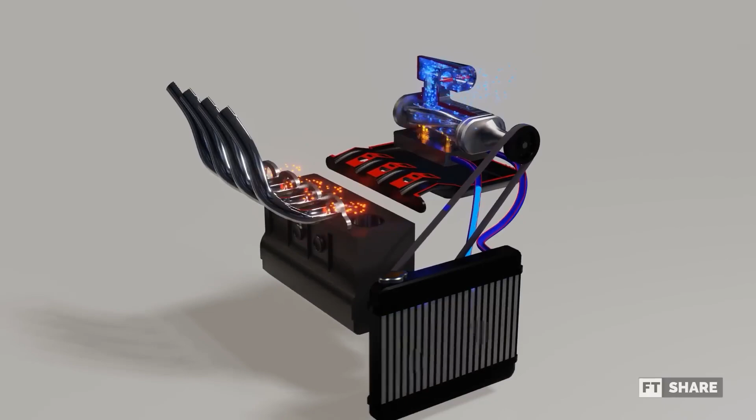In this video, we are going to discuss the rival of the turbocharger, a forced induction system that is commonly installed in muscle cars, namely the supercharger.

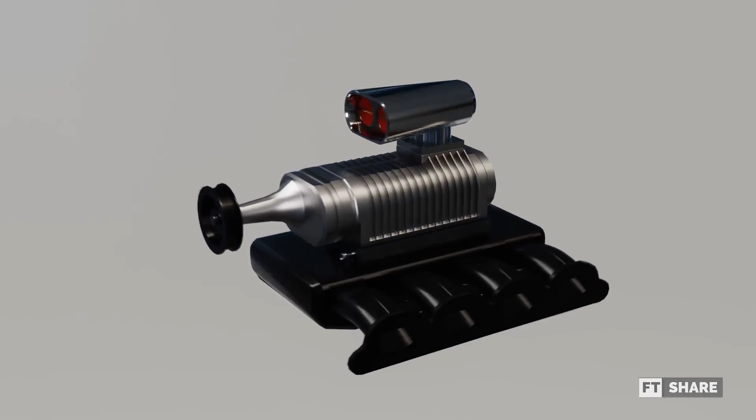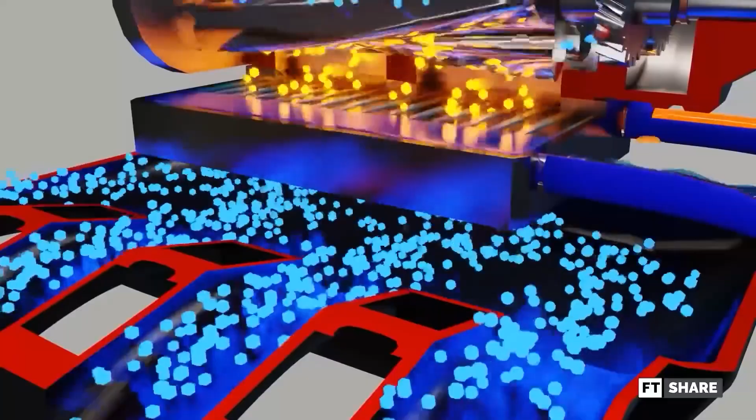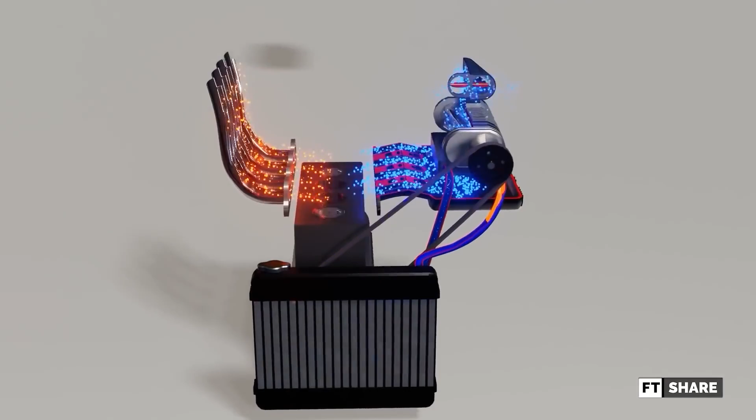The supercharger is a forced induction technology discovered by G. Jones in 1848. Thus, the supercharger was discovered before the turbocharger. The function of this device is to increase the air capacity and airflow in internal combustion engines, with the goal of providing more oxygen so that the engine can process more fuel more efficiently. And of course, this results in more power compared to standard engines that do not use forced induction systems.

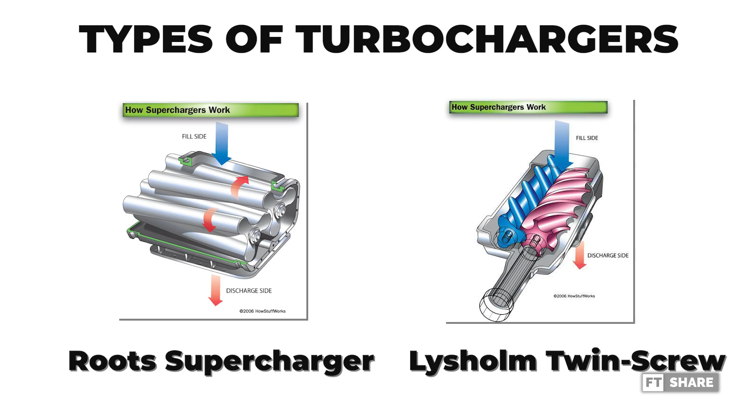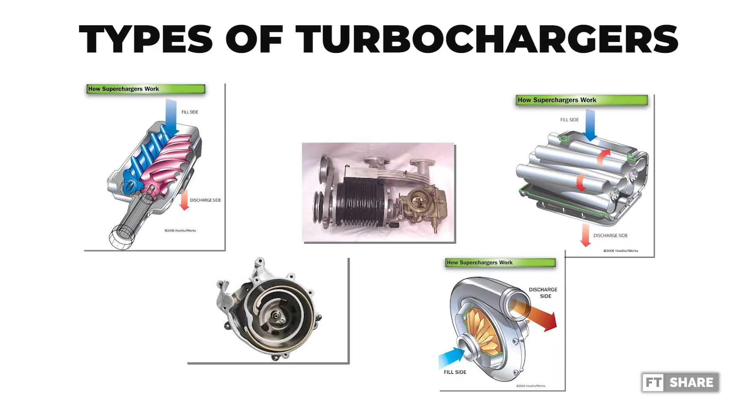There are several types of superchargers in the market. The first one is the Roots supercharger, the second one is the Lysholm twin-screw supercharger, the third one is the sliding vane supercharger, the scroll-type supercharger, and finally there is the centrifugal supercharger. Here, we won't discuss all these types one by one because the goal of all these superchargers is certainly the same, which is to introduce the principle of forced induction system.

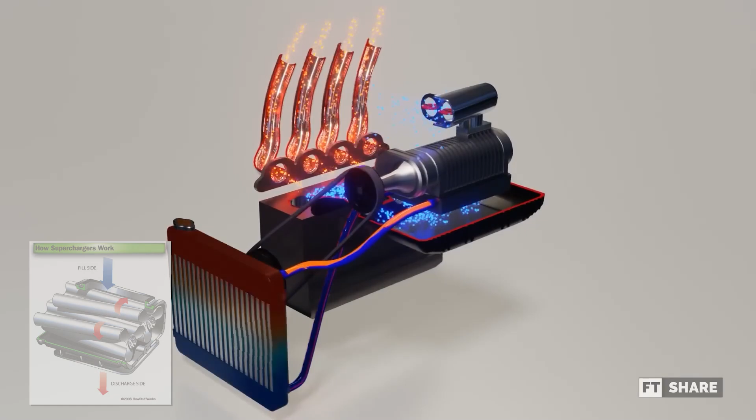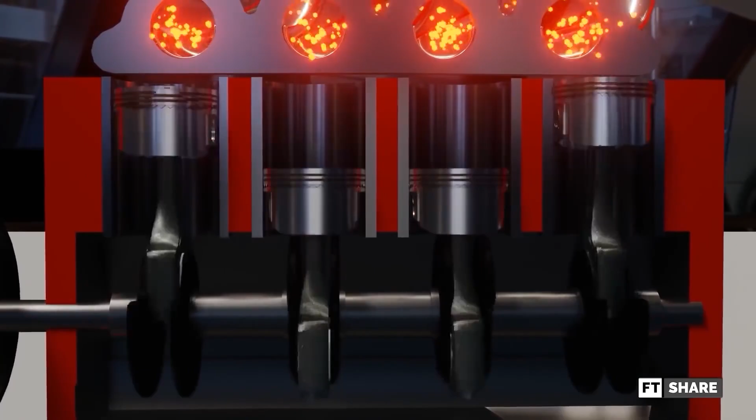The supercharger starts working when the engine is turned on because the crankshaft rotates, and this rotation is used by the supercharger. By connecting a pulley directly to the crankshaft, the rotation can be transmitted to the drive pulley located in the supercharger unit through a belt called a serpentine belt.

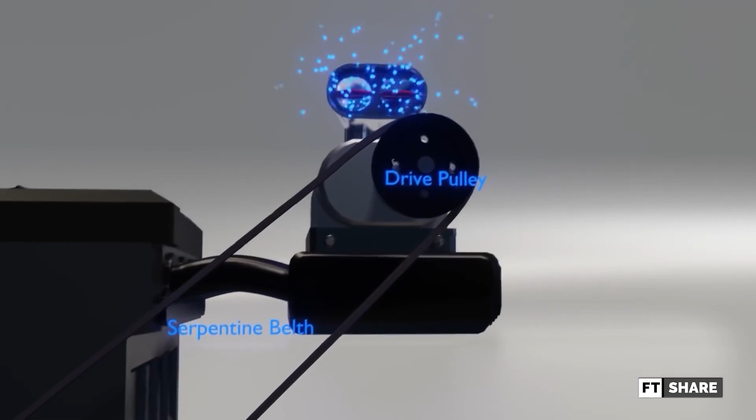Then, the rotation on the drive pulley is further transmitted through a shaft to a pair of rotors, which are the main components of the supercharger.

However, before the energy reaches the rotors, we will find a pair of gears commonly referred to as the timing gears. The function of these gears is to rotate the two rotors more precisely to avoid friction between the rotors.

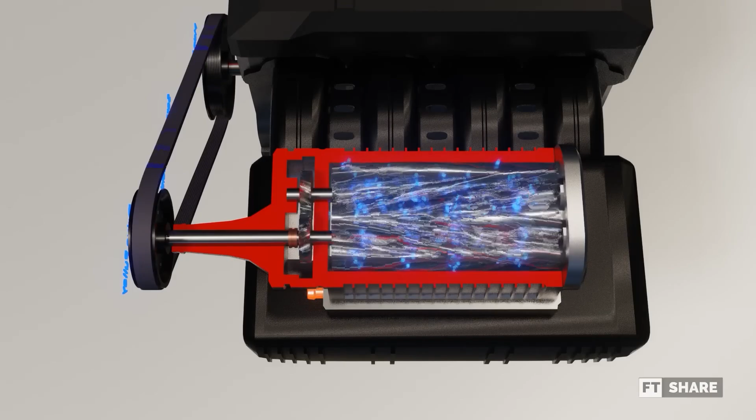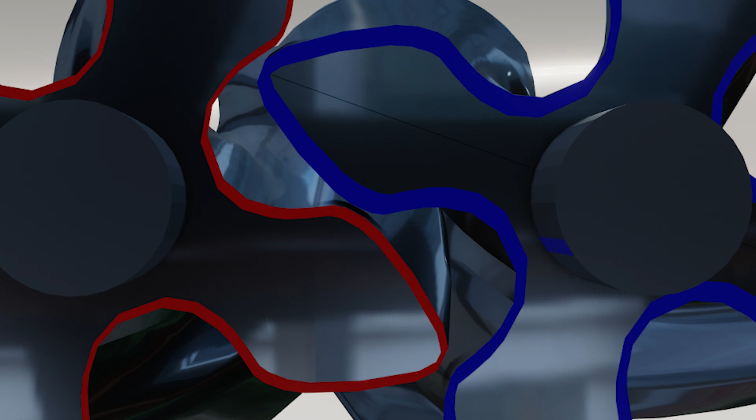The reason for this is that if the rotational energy is transmitted directly to the rotors, they will rub against each other extensively along their surfaces, resulting in greater frictional forces. This, of course, leads to a higher load on the motor and also to wear or erosion of the two rotors because there is no lubrication in the rotor area.

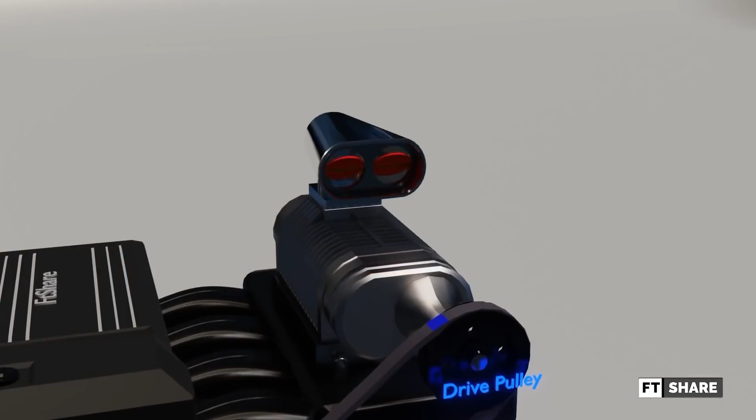Next, as the rotor begins to rotate, negative pressure or vacuum is created. Then, as we step on the accelerator and begin to increase engine speed, the negative pressure increases, the throttle body opens, and air from the atmosphere is more freely drawn toward the rotor. As a result, the air passing through the rotor is compressed.

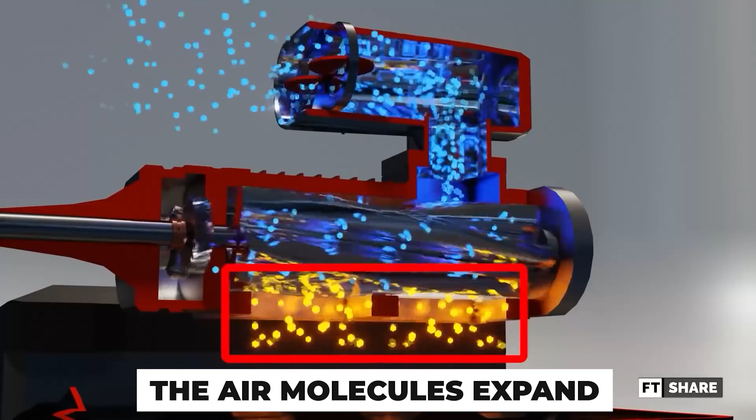However, there is a problem at this stage because the forcibly compressed air will experience molecular friction, causing the air molecules to heat up and expand. As a result, the air cannot be compressed to its maximum.

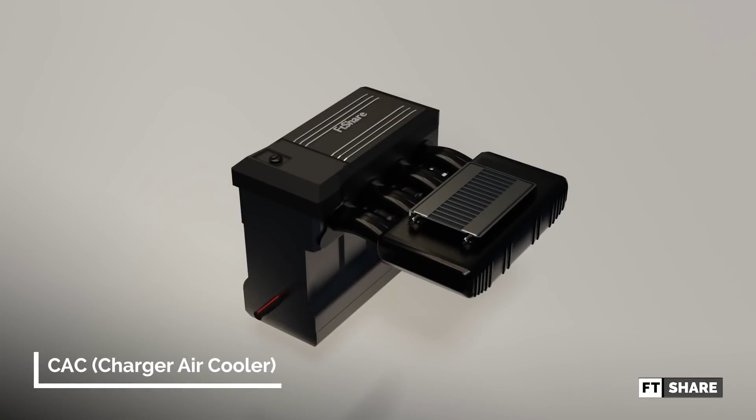To solve this problem, a special radiator, commonly known as a charge air cooler, CAC, is installed between the intake manifold and the supercharger unit. This radiator is responsible for lowering the temperature of the air that passes through its grill, or more precisely, through its tubes and fins.

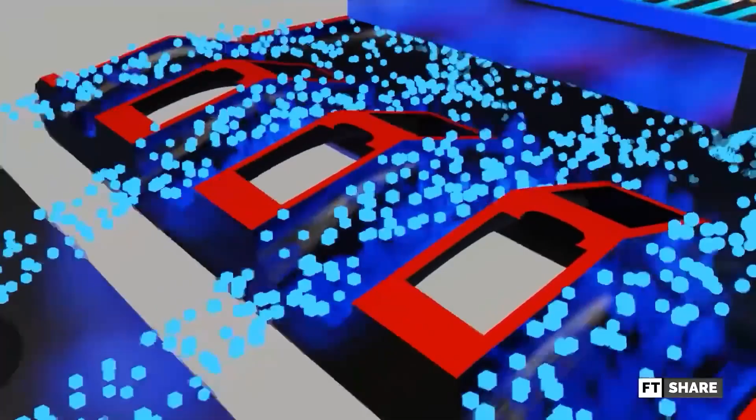The air molecules that pass through this grid automatically shrink and become denser. Then, the required air pressure along with more fuel is introduced into the combustion chamber, creating a greater force to turn the engine, and the exhaust gases are expelled through the exhaust pipe.

Okay, that's the detailed working algorithm of a supercharger that we can provide. For those of you who want to add or correct anything in our explanation, you can write it in the comments below. Now let's try to explain it again more briefly, so that others can understand it better.

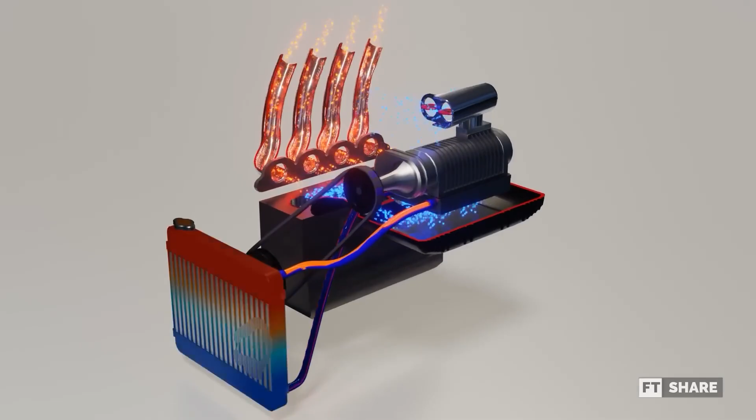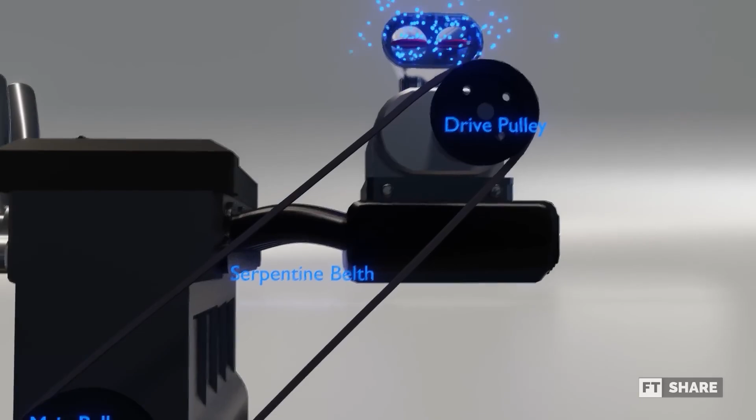The supercharger begins to function when the engine is started, with the crankshaft that rotates being directly connected to a pulley located in front of the engine. This pulley is responsible for transferring rotation to the drive pulley of the supercharger through a belt called a serpentine belt. The rotational energy then continues through a shaft to the gear section, which functions to rotate both rotors.

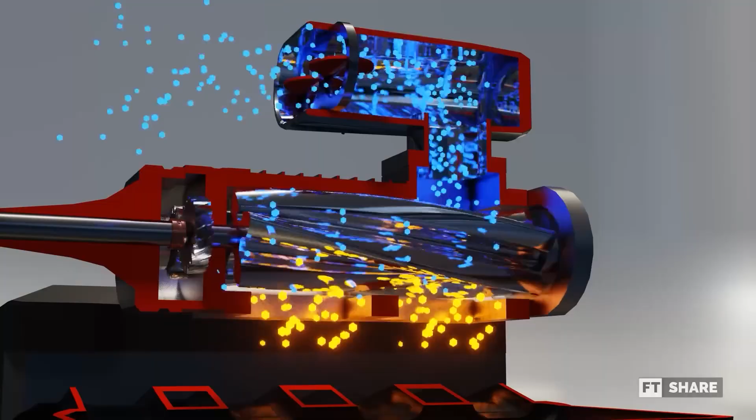When both rotors begin to spin, suction power is created that draws air from the atmosphere and compresses it within the housing. This compressed air is then cooled again using a water cooler radiator.

Once cooled, the air is compressed once more in the intake manifold to the required pressure before being supplied to the engine, along with more fuel, thus becoming a significant power source for the engine. Finally, the remaining exhaust gas after the expansion is expelled through the exhaust pipe.

This is a general overview of the supercharger system. However, it is important to note that if a supercharger is applied to a standard engine, engine adjustments are also required, and the process is analogous to that of applying a turbocharger.

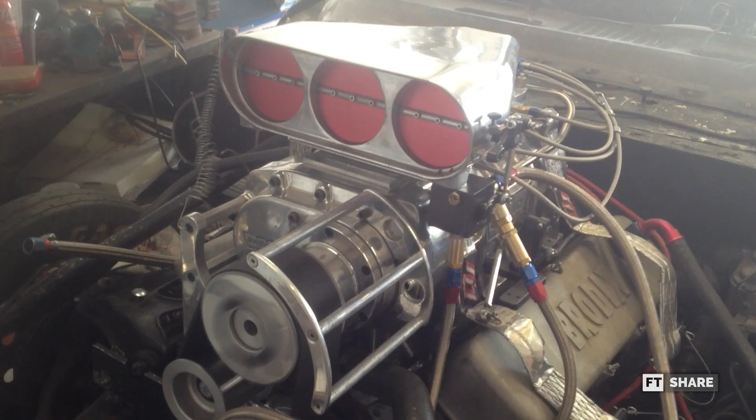It begins with the adjustment of compression in relation to the boost generated by the forced induction, as well as the ideal compression requirements for the fuel to be used subsequently. This is followed by the adjustment of the ignition timing and the amount of fuel supply.

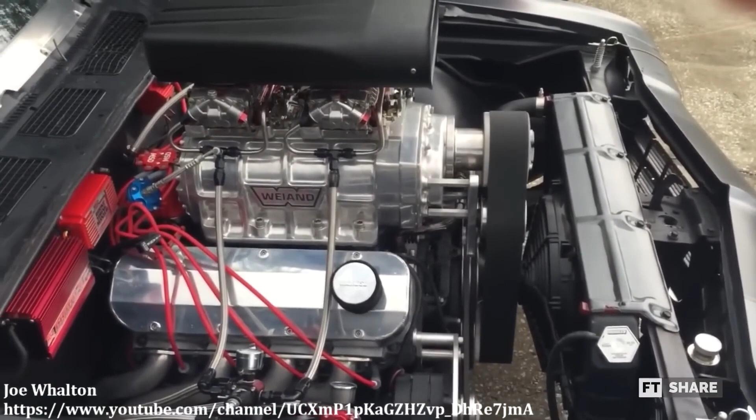Finally, the replacement of some moving parts with stronger ones, such as pistons, piston rods, and others, is necessary to accommodate the increase in power. This approach is designed to ensure that the engine's durability can accommodate the increase in power.

This is the explanation that can be provided about the supercharger, particularly the model that was discussed.